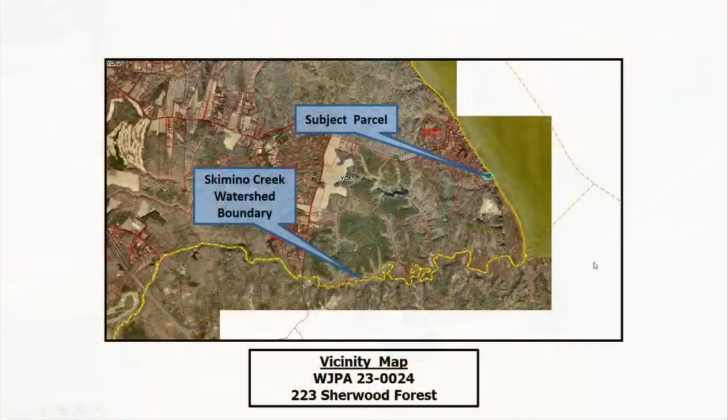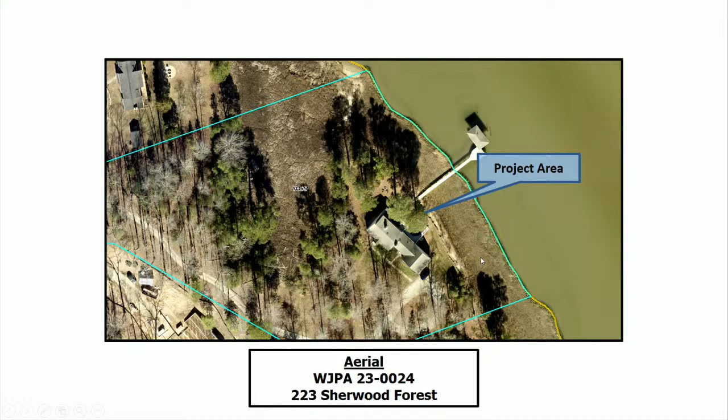This parcel can be seen here on the vicinity map, outlined in blue, and an aerial photograph of this property is also up on the screen. The area in question abuts the shoreline adjacent to an existing marsh. Some topography as it affects this site, and the floodplain as it affects this site.

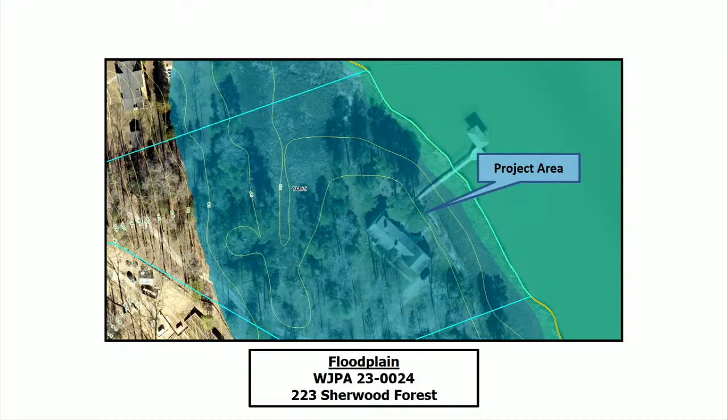The applicant is proposing to install a revetment along a shoreline scarp landward of that existing marsh and toe sill that exists in this channel. The existing shoreline is sloughing back towards a deck corner and threatening the integrity of the home on the property. For this reason, the applicant is proposing to line approximately 200 linear feet, 1,760 square feet of the existing shoreline with riprap. Because of the proximity of the deck to the existing marsh, there are approximately 30 square feet of vegetated wetland loss anticipated with the proposed revetment.

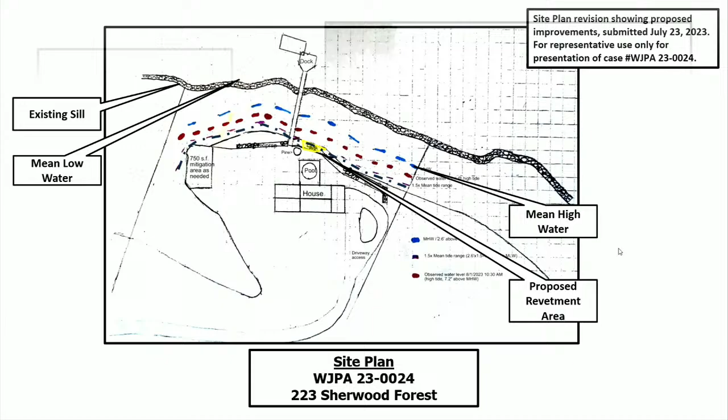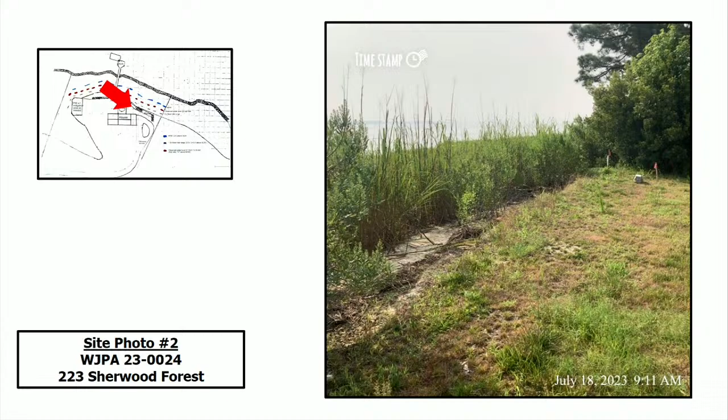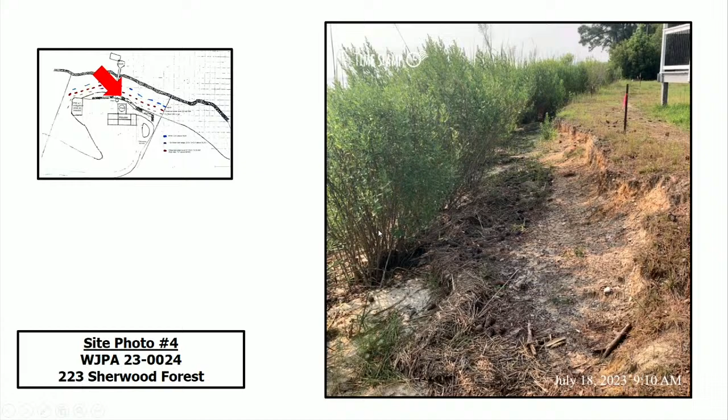This is the other side of that pier, looking at the other side of the property, and looking at the general region of which wetland loss would be occurring and the portion that falls within this board's jurisdiction.

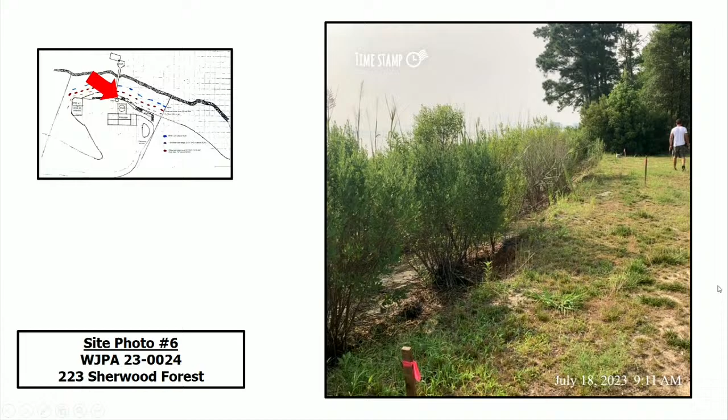As published in the Virginia Register on July 11th, 2005, the revised Wetland Mitigation Compensation Policy and Supplemental Guidelines, Regulation 4 VAC 20-390-10: Virginia as a Chesapeake Bay program partner is committed to achieve a no net loss of existing wetlands acreage and function in the signatory's regulatory program.

In order for a proposed project to be authorized to impact wetlands and compensate for the wetland loss in some prescribed manner, the following 3 criteria must be met.

All reasonable mitigative efforts, including alternative siting, which would eliminate or minimize wetland loss or disturbance, must be incorporated in the proposal. The proposal must clearly be water dependent in nature, and the proposal must demonstrate clearly its need to be in the wetlands and its overwhelming public and private benefits.

If the proposed project cannot meet one or more of the above criteria, the project must be denied or must occur in areas outside of wetlands. Should it satisfy all 3 criteria, however, compensation for the wetland loss is required.

The sequence of acceptable mitigation options should be as follows: on-site, off-site within the same watershed, mitigation banks in the same watershed, or a payment of an in lieu fee. If compensation is required, it should be a condition of the permit.

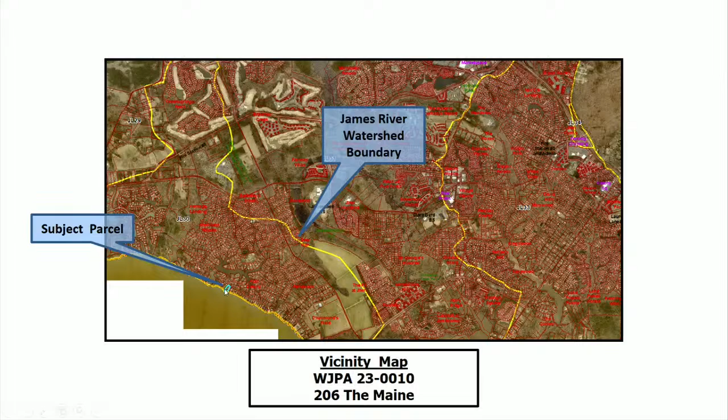James Ducker for the replacement of a bulkhead on property located at 206 The Maine within the James River watershed. The property can be seen outlined here in blue, and the watershed outlined in yellow. Here is aerial photography of the property. There is an existing timber bulkhead along the shoreline that is failing in multiple places.

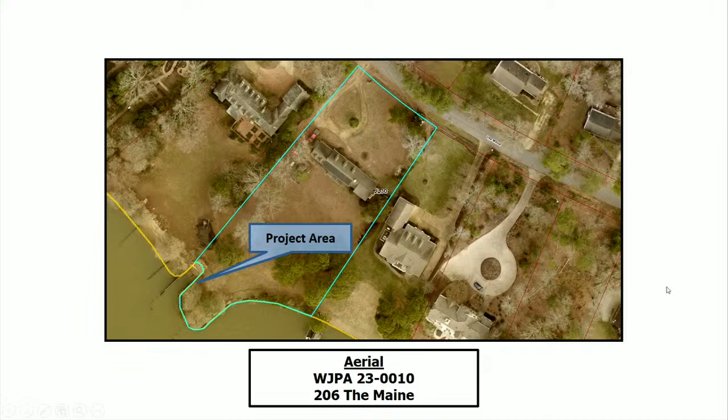Here's the topography at that site, the floodplain as it affects this property. As I said, there is the failing bulkhead along the shoreline. The applicant is proposing to replace this existing 300 linear foot bulkhead with a vinyl bulkhead. The new bulkhead will be installed in place of the existing structure along the peninsula and directly in front of the existing structure where severe erosion has not yet occurred.

The applicant has stated that a living shoreline is not appropriate for this property due to the significant grading that would be required and the loss of vegetation landward of the shoreline. You can see mean low and mean high water. Therefore, the board's jurisdiction is this area of the bulkhead shown in yellow, and the area of wetland impact, I think, got shifted a little bit, but should be kind of in line with the board's jurisdiction.

But due to the bulkhead failing, vegetated wetlands now exist landward of the existing bulkhead, hence why there are vegetated wetland impacts. By performing the bulkhead replacement, approximately 30 square feet of vegetated wetland impacts are anticipated with this project.

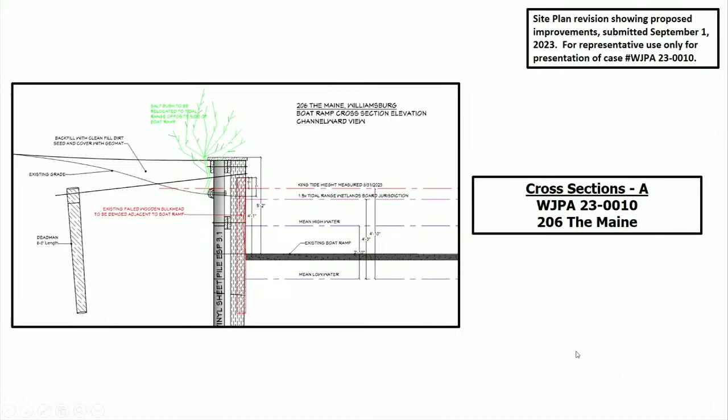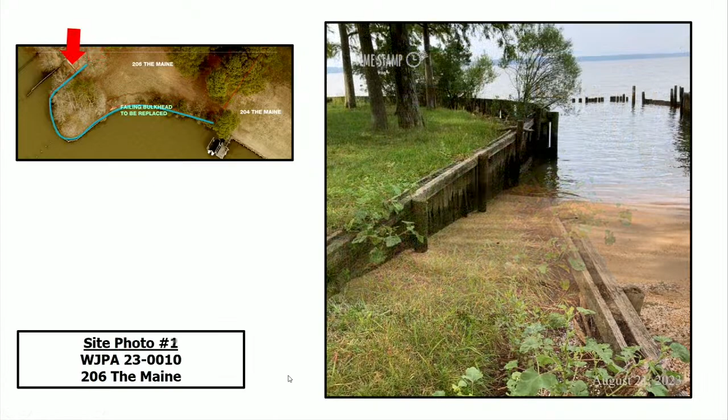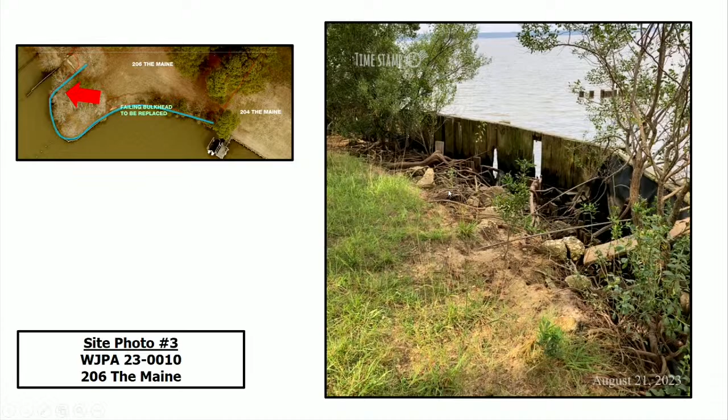Additionally, here is a cross-section of the proposed project. Site photography showing the portion within the board's jurisdiction here by the existing boat ramp. The issues with the existing bulkhead and the vegetated impacts, or vegetated wetlands occurring as a result of the failure. And just more pictures of the issues happening on this site currently.

As published in the Virginia Register on July 11th, 2005, the revised wetland mitigation compensation policy and supplemental guidelines, Virginia, as a Chesapeake Bay program partner, is committed to achieve a no net loss of existing wetland acreage and function in the signatories' regulatory programs. In order for a proposed project to be authorized to impact wetlands and compensate for the wetland loss in some prescribed manner, the following 3 criteria must be met.

All reasonable mitigative efforts, including alternative siting which would eliminate or minimize wetland loss or disturbance, must be incorporated into the proposal. The proposal must clearly be water dependent in nature, and the proposal must demonstrate clearly its need to be in the wetlands and its overwhelming public and private benefits.

If the proposed project cannot meet one or more of the above criteria, the project must be denied or must occur in areas outside of wetlands. Should it satisfy all 3 criteria, however, compensation for the wetland loss is required. The sequence of acceptable mitigation options should be as follows: on-site, off-site within the same watershed, mitigation banks in the same watershed, or a payment of an in lieu fee. If compensation is required, it should be a condition of the permit.

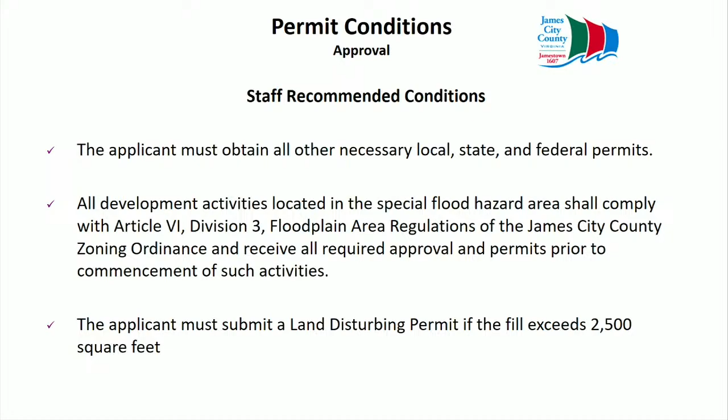The applicant must submit a land disturbing permit if the fill landward of the proposed bulkhead should exceed 2,500 square feet. If the applicant is not able to mitigate on site, the applicant must provide a receipt for the purchase of 30 square feet of tidal wetland credits from an approved wetlands mitigation bank.

The wetlands permit for this project shall expire on September 13th, 2026 if construction has not begun, and if an extension of the permit is needed, a written request must be submitted to the Stormwater and Resource Protection Division no later than August 2nd, 2026, which is 6 weeks prior to the expiration date.

If there are any questions, I'd be happy to answer them at this time. Thank you, Ms. Benedict. Any questions for Ms. Benedict?

The existing piles on the outside of that ramp that are busted off and broke off - are they going to remain like that? It looks like they just keep eroding and breaking off, and it's a hazard even coming in there. Is that going to be repaired? It's not part of this project as proposed.

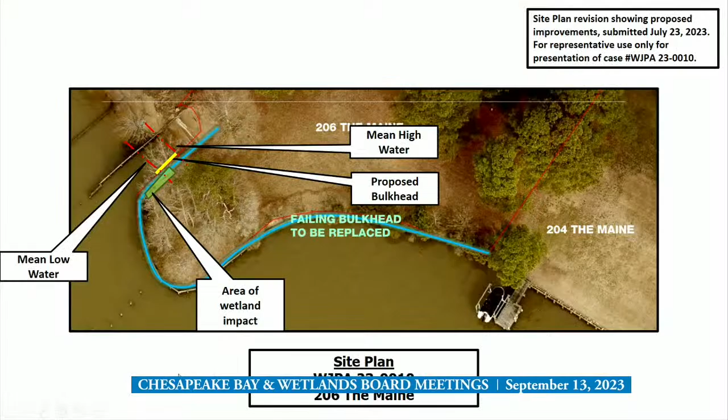Any other questions? So the bulkhead's gonna go around the entire perimeter of that blue line up there? Correct. The only portion that is within our jurisdiction is that limited area. Yes, back on the site plan, it's the area in yellow above. That is within the board's jurisdiction, including the vegetated wetlands behind. Yes, sir.

So I presume that the rest of the bulkhead is channelward of mean low water? Is that correct? Correct. What is the restriction on that channel as far as replacing and fixing that? Would that come before our board or not, if it were to be repaired? No, because it's not between mean low, 1.5 times mean low and mean high water. It's not within the jurisdiction of this board.

Thank you, Ms. Benedict. Does anyone from the public or does the applicant wish to speak on this matter? Please state your name and address for the record. Randy Carnell, 513 Dandy Loop Road in Yorktown.

Good evening. I don't have anything else to say, she did a great job summarizing the project. It's pretty straightforward, other than the fact that over time, this area of concern in the green up there has become part of your jurisdiction. There's a salt bush there, and I agree it's about 30 square feet, and the property owner has agreed to pay the mitigation because of the impacts.

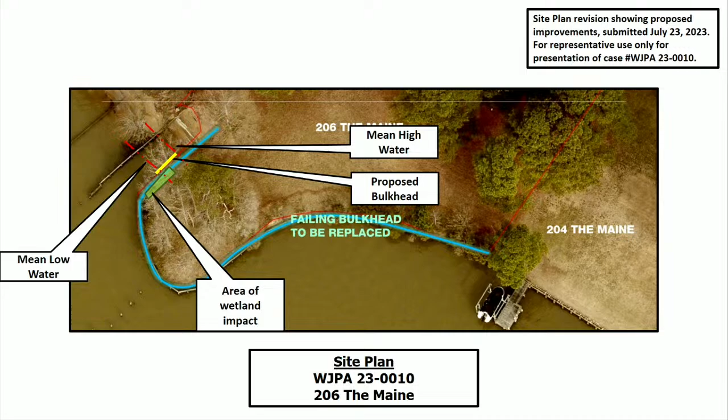On the northern side of that boat ramp, we would like to attempt to mitigate on site if possible. But from my understanding from Trevor, the state came out and said they do not recommend trying to move that salt bush over there because it most likely won't survive. So we're going to move forward with the mitigation. If y'all have any other questions, that's really why I came up here. Any questions? All right, thank you so much for your comments.

Seeing no other individuals wishing to speak, I'd like to close the public comment period, and it is up before the board. Any questions, comments, discussions from the board? Seeing none, do we have a motion on the floor?

Motion to adopt the resolution to grant the permit request for Wetlands Board Case WJPA 23-0010. Mr. Wilson, we have a motion to adopt the resolution. Can you get a roll call, please? Motion to adopt: Mr. Roadley, yes. Mr. Waltrip, yes. Mr. O'Brien, yes. Mr. May, yes. Motion passes 4-0.

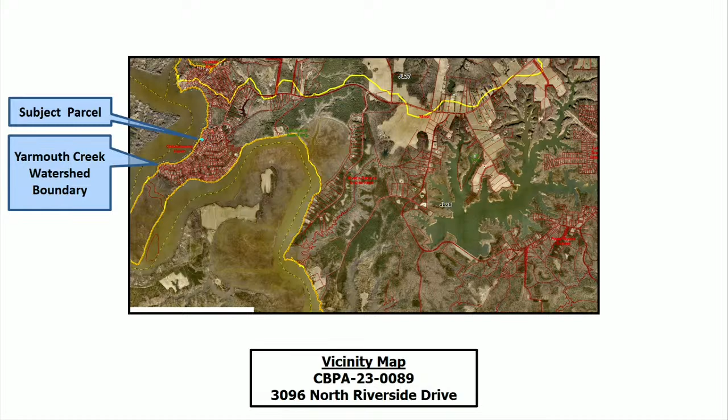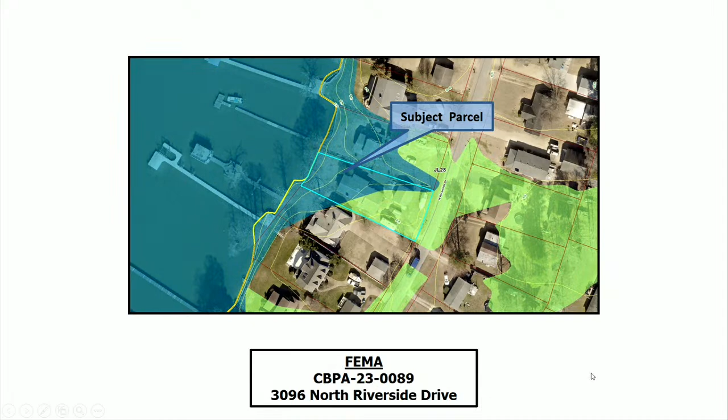Above, you can see the parcel outlined in blue here. This parcel was platted in 1959 prior to the adoption of the Chesapeake Bay Preservation Ordinance in 1990. Here you can see aerial photography of the property, the topography of the property, which is fairly flat, the floodplain as it affects this property, and the resource protection area.

The total lot size of this property is 0.32 acres, of which 31% is located within the RPA. The applicant is proposing to construct a new 156 square foot deck adjacent to the rear of the home.

Existing conditions on this property include a 126 square foot concrete patio in the area of the proposed deck. The existing patio is shown here in red, and the proposed deck would extend on either side of the existing patio, with those areas shown here in yellow.

You'll see the 100-foot RPA and the 50-foot RPA shown in red, as well as the floodplain shown here in blue. Total new impacts to the RPA associated with this proposal equate to 30 square feet within the landward 50-foot RPA. Required mitigation for this amount of impervious impacts equals 2 shrubs.

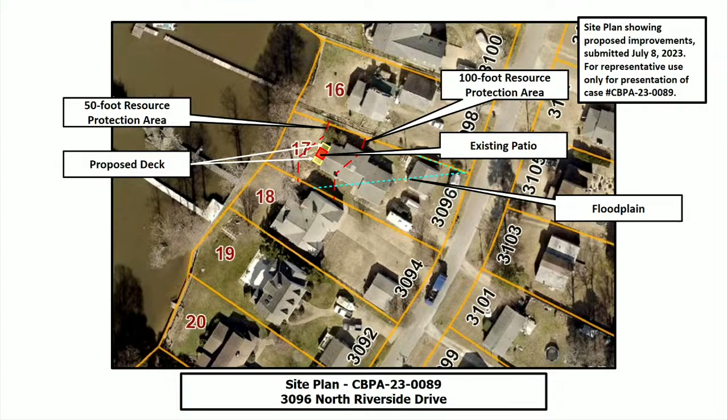Staff has evaluated the application and exception request for the construction of a deck. This application meets the ordinance conditions in sections 23-11 and 23-14 and should be heard by the board because the construction of a deck is considered accessory in nature. The board may grant exceptions to section 23-7 if the application meets the following 5 conditions.

The exception request is the minimum necessary to afford relief. Granting the exception will not confer upon the applicant any special privileges denied to other property owners in the vicinity. The exception request will be in harmony with the purpose and intent of Chapter 23 and is not of substantial detriment to water quality. The exception request is not based on conditions or circumstances that are self-created or self-imposed, and reasonable conditions are imposed which will prevent the exception request from causing a degradation of water quality.

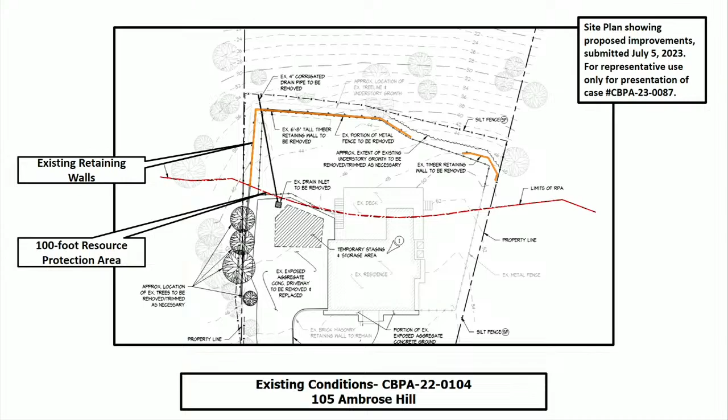Case number CBPA-22-0104 did appear before the board on September 14th, 2022 for the approval and the replacement of this retaining wall. The applicants revised the approved plan to account for an additional retaining wall necessary to accommodate James City County retaining wall ordinances. This section, though it is light, would be indicated here in this corner. At that portion of the wall, the proposed and previously approved wall became too tall to meet the zoning and building ordinance of James City County.

Given that this approved permit would expire tomorrow, the applicants wish to bring the entirety of the project, including the new retaining wall, to the board this evening. Total impacts to the RPA associated with this proposal equate to 124 square feet of impacts to the landward 50-foot RPA. Required mitigation for this amount of impervious impacts equals the planting of 5 shrubs.

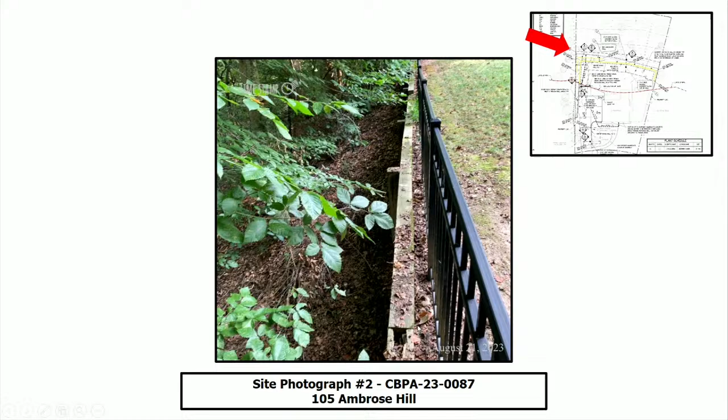Looking down this line, you can see degradation within this retaining wall, and looking back in that same area where the second retaining wall will be necessary, again further evidence of the degradation occurring in the existing retaining wall.

Staff has evaluated the application and exception request for the construction of 2 retaining walls. This application meets the ordinance conditions in sections 23-11 and 23-14 and should be heard by the board because construction of retaining walls is considered accessory in nature. The board may grant exceptions to section 23-7 if the application meets the following 5 conditions.

The exception request is the minimum necessary to afford relief. Granting the exception will not confer upon the applicants any special privileges denied by Chapter 23 to other property owners similarly situated in the vicinity. The exception request will be in harmony with the purpose and intent of Chapter 23 and is not of substantial detriment to water quality. The exception request is not based on conditions or circumstances that are self-created or self-imposed, and reasonable and appropriate conditions are imposed which will prevent the exception request from causing a degradation of water quality.

Staff has reviewed the application and exception request and has determined the impacts associated with the proposal to be minor for the proposed development. Staff recommends approval for this exception request, and if the board wishes to approve the request, staff recommends the following conditions be incorporated into its approval.

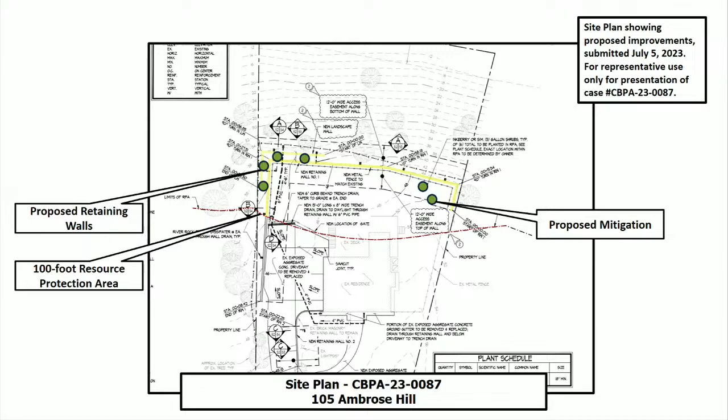So it's tearing down the very high retaining wall? Yes, sir. Okay, very good. Thank you very much. Thank you.

I would like to open the public hearing. Is there anyone that would like to address the board on this matter? Very good. The public hearing will remain open. Any further discussion from the board? Sir? And I will close the public hearing.

Do we have a motion? Motion to adopt the resolution to grant the exception request for Chesapeake Bay Board case CBPA 23-0087 at 105 Ambrose Hill. Mr. Wilson, motion to adopt. Mr. Waltrip? Yes. Mr. O'Brien? Yes. Mr. May? Yes. Mr. Roadley? Yes.

Motion passes 4-0. Next item on the agenda is CBPA 23-0098 at 109 Brancaster. Ms. Benedict.

Mr. Chair, members of the board, Robin Benedict, Watershed Planner, presenting CBPA 23-0098. Mr. Chase Grogg with Landtech Resources has applied for a Chesapeake Bay exception on behalf of Ms. Hillary Brown and Mr. Darnell Lamont Coville for encroachments into the RPA buffer for the construction of a single-family dwelling located at 109 Brancaster within the Fords Colony subdivision and the Powhatan Creek watershed.

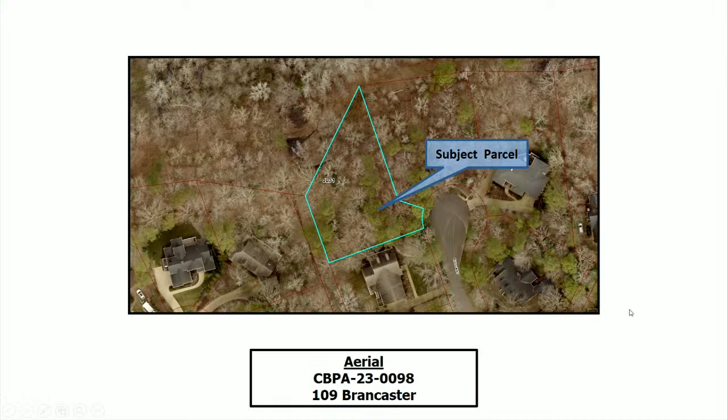You'll find the subject parcel outlined here in blue. This parcel was platted in 1981 prior to the adoption of the Chesapeake Bay Preservation Ordinance in 1990. Here is aerial photography of the property. It is completely wooded and does have wetlands on the back half of the property.

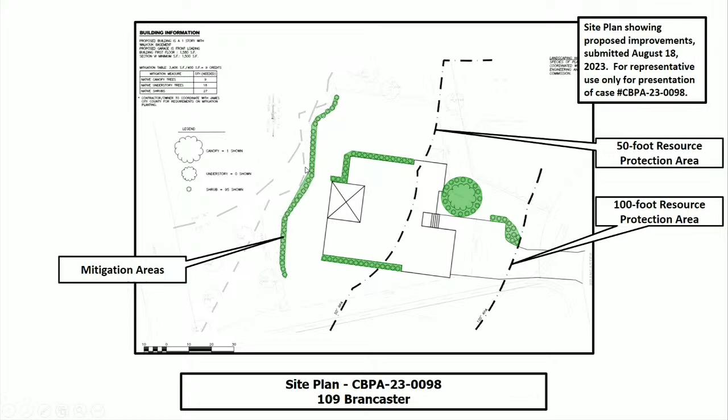Staff is also requesting that an affidavit be recorded in the Williamsburg, James City County Courthouse due to the environmental sensitivity of this lot.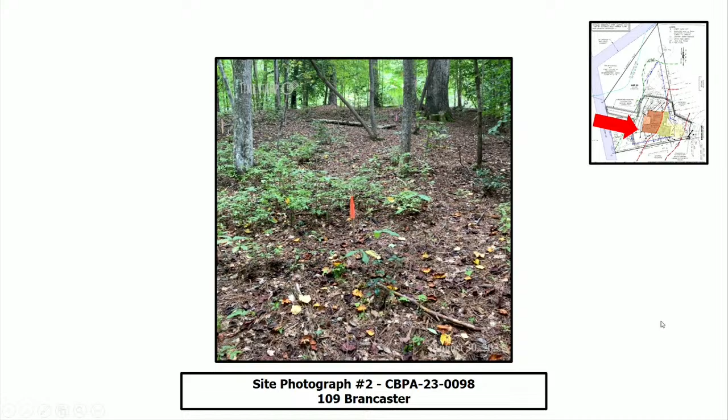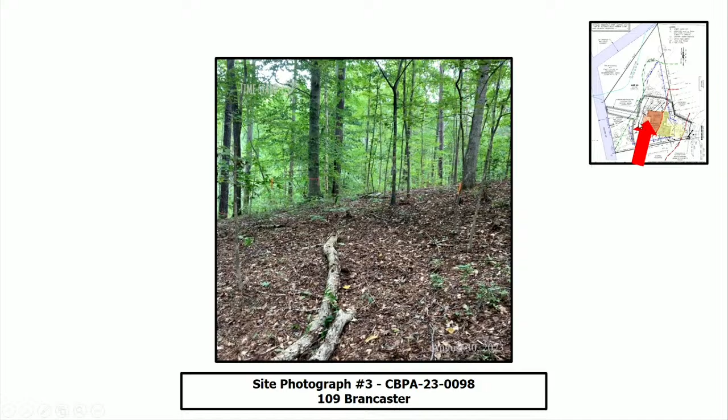Here is site photography, standing at the road and looking back towards this property. Standing at the back of the house and looking up towards the road. Looking, here is another house corner flagged here in orange, showing the right side of the property and back towards the wetlands.

Staff has evaluated the application and exception request for the construction of a single-family dwelling. This application meets the ordinance conditions in sections 23-11 and 23-14 and should be heard by the board because the construction of the single-family dwelling extends into the seaward 50-foot RPA. The board may grant exceptions to section 23-7 if the application meets the following 5 conditions.

The exception request is the minimum necessary to afford relief. Granting the exception will not confer upon the applicants any special privileges denied to other property owners in the vicinity. The exception request will be in harmony with the purpose and intent of Chapter 23 and is not of substantial detriment to water quality. The exception request is not based on conditions or circumstances that are self-created or self-imposed, and reasonable conditions are imposed which will prevent the exception request from causing a degradation of water quality.

Staff has reviewed the application and exception request and has determined the impacts associated with this proposal to be major for the proposed development. Staff recommends approval for this exception request, and if the board wishes to approve the request, staff recommends the following conditions be incorporated into the approval.

The applicants must obtain all other necessary federal, state, and local permits as required for this project. An affidavit must be recorded in the Williamsburg, James City County Courthouse prior to the issuance of a building permit. The applicants must submit a surety of $6,750 and a form acceptable to the James City County Attorney's Office to guarantee the mitigation plantings.

In response to you, Mr. Rodley, about other mitigation measures, we're technically slightly overplanted. Mitigation calls for 8.5. We're proposing 9 mitigation credits. The lot basically slopes from the beginning all the way to the back, so we don't have a lot of opportunity to be able to place some sort of infiltration, with at the toe of the slope right next to the wetlands, concerns with that water getting back into that.

It's outside of your guys' jurisdiction, but just to point it out, right now our clean out is clear back here, which is through the wetlands. Along this property line, you'll see there's a manhole here, a clean out, and a clean out. We are working with JCSA to see if there's a way that we could avoid those wetland impacts and shift that clean out coming over here. I haven't gotten final clarification of that. It looks positive at the moment, but again, I know that's outside of your guys' jurisdiction, but it would be nice to be able to leave those wetlands intact and be able to armor that with our mitigation right in front of it. Happy to answer any other questions you have.

Ms. Brown, Mr. Coville, and their contractor, Brian Parsons, are also here as well. Any questions?

The elevation of the wetlands water level to the bottom of the basement - how much lower is the basement than the water level for the wetlands? Proposed basement is down at about 39, and the flood zone in that area is elevation 33. So we're significantly higher than the flood zone, as well as the wetlands. The wetlands run right along about the 33-foot contour. So we're going to sit up. You're going to have flooding into that? Oh, we will be completely in flood zone X.

Back to our site plan. One thing I'd like to point out to the members of the board, there's an existing concrete swale. So he is correct that the water comes around here, goes into this swale. There'll be a pipe underneath our driveway. This swale coming from this side turns here, goes along the property line. So some of our water will utilize that existing channel that's been there for stormwater to be able to direct that water away from our house, as well as to be able to handle some of our water. I'd just like to point that out.

Again, not exactly an RPA issue, but helpful to understand where some of our runoff is going to go from our lot. Within the context of the flood zone, perhaps we could move to the floodplain map here. The flood zone is this line, right, the triple dot with a dash. This dashed, triple-dot line comes right along basically the wetlands. As discussed, this is the 32 contour. Right now we only have even contours on here, otherwise it's a contour city. That runs basically along the 33, which is the flood zone elevation. When the lot was originally platted, the 100-year flood elevation was way in the back. Obviously things have changed since that was done, but so that's where it currently is.

Again, our finished floor will be well above, well out of the concerns of that. Yes, there'll be water relatively close behind our house, but the presumption that there would be water in that building envelope is going to be from runoff, not so much from the water flowing up. There could be, there's always the chance when you dig a basement that you run into groundwater, but you can install a French drain to handle that.

I don't believe surface runoff is going to be a concern on our lot, because there's going to be a ridge across the front that directs water into this channel. We'll handle the bit that comes off our roof through a swale that sheet flows out this way. We wanted it to be sheet flow as possible, since we don't want a channel that whips around and goes all the way down. So the only swale on our property is out front to get water away from the house. The rest is sheet flow into this concrete ditch and out into the woods prior to the resource.

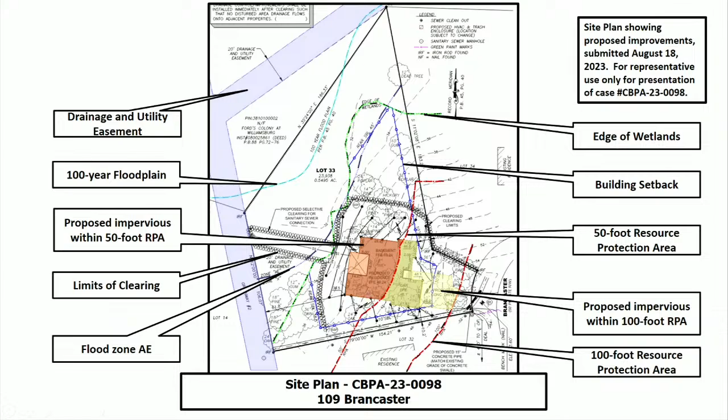Would anybody else care to address the board on this matter? Hearing none, the matter is before the board for discussion.

Mr. Chair, when first looking at this, I was wanting to see some additional mitigation measures, since there's a lot of water coming down that street out into the wetland area as far as the water flow path. But they do have a concrete swale and things directing the water around the house to an existing drainage system. The home is built as close to the building setback as they can get it. They can't push it any further forward out of the RPA - it's always going to be in the RPA. The square footage of the house is right at the minimum on that street, just 6% over. But I think I would be inclined to support this application.

Other thoughts or comments from the board? I don't have much to add to that. Waltrip?

I think they've done as much as they can do to move that water down the side. That house is not in the floodplain, and I personally would not.

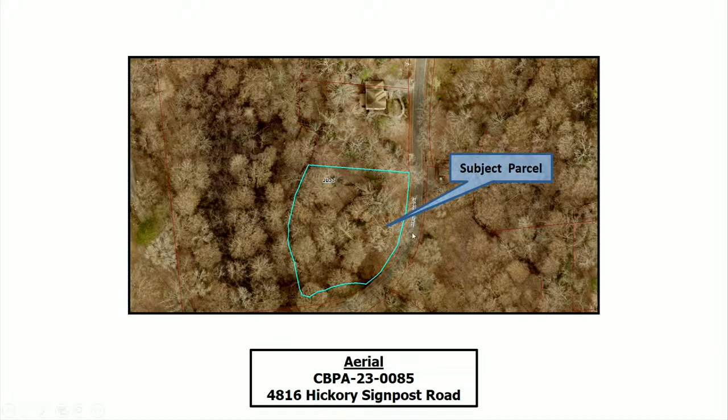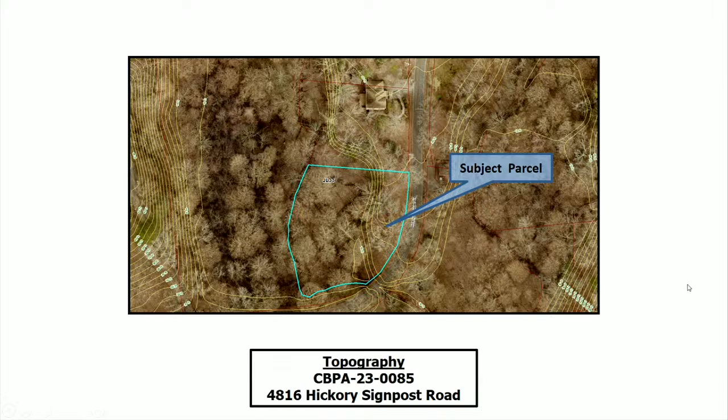The topography and existing conditions of this site: there is a small flat area adjacent to Hickory Signpost Road, of which the subject parcel is proposed, and it slopes off fairly quickly into a floodplain wetland system with a stream running through the middle. The RPA as it affects this property is 100% within the RPA.

Total impacts to the RPA associated with this proposal equate to 134 square feet of impacts to the landward 50-foot RPA and 948 square feet of impacts to the seaward 50-foot RPA. This house is approximately 420 square feet.

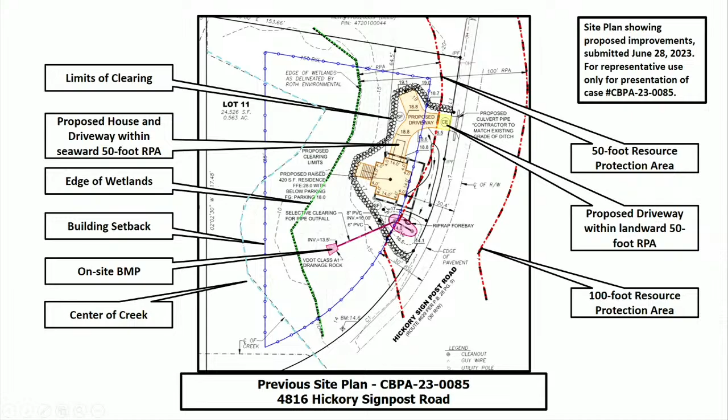I did want to point out that there has been a change. This deck on the back here is now proposed to the side here. Oh, I'm sorry, this is the previous site plan, so I'm glad to see that. This is the previous site plan submitted for this case.

A change has been made to decrease the amount of impacts towards those wetlands. They have moved these stairs over to the side. In total, while it does not decrease the impervious area on this site, it does decrease the disturbance on the site by 60 square feet.

Total impacts to the RPA, again, equate to 1,082 square feet of impacts associated with everything here. That includes the driveway and the proposed house.

In May of 2022, the applicants gained approval from the Board of Zoning Appeals to move the building setback from 60 feet to 30 feet in an effort to move the proposed dwelling further from the wetlands.

This property appeared before the Chesapeake Bay Board in June of 2022 for the approval of a 548 square foot single family dwelling. I'm going to move one slide ahead to give you guys the history of this exception request.

The original approval request included a 548 square foot single family dwelling with a 140 square foot deck, a 109 square foot patio, and a 942 square foot driveway. Exception request CBPA 22-0060 was denied during this meeting.

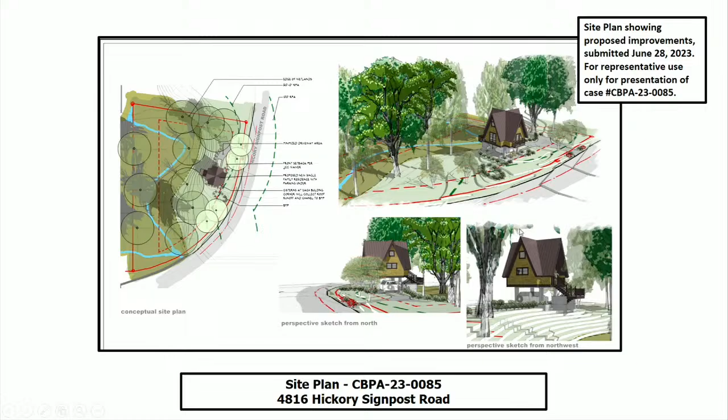This is an architectural rendering of this house. It hasn't been updated to show how the stairs were relocated, though it is still applicable to the remainder of the house.

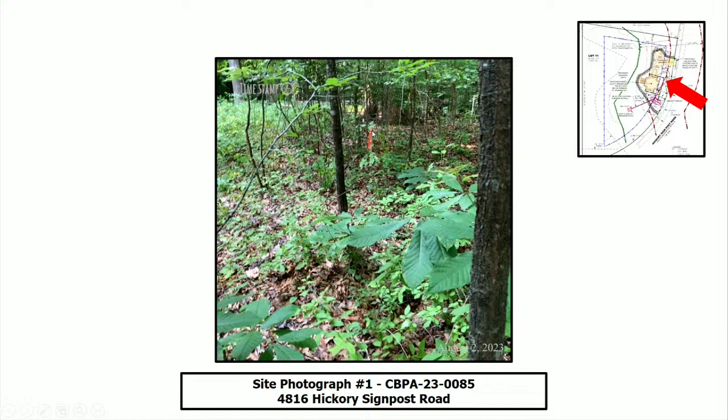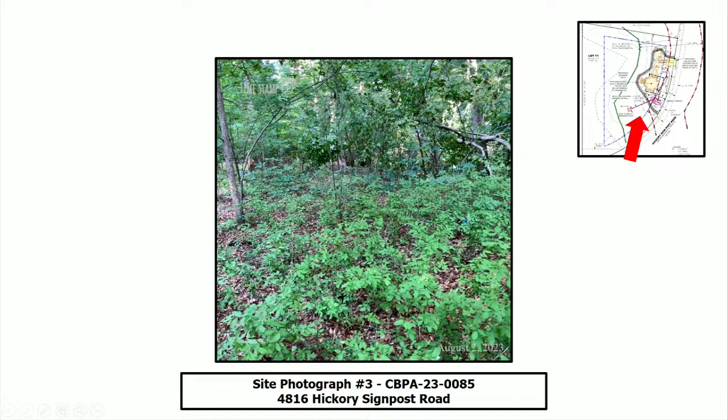Some site photographs. This orange stake here indicates the corner of the front home. Kind of looking back towards the resource and where the BMP may be located. Through this brush here would be the approximate location of the home.

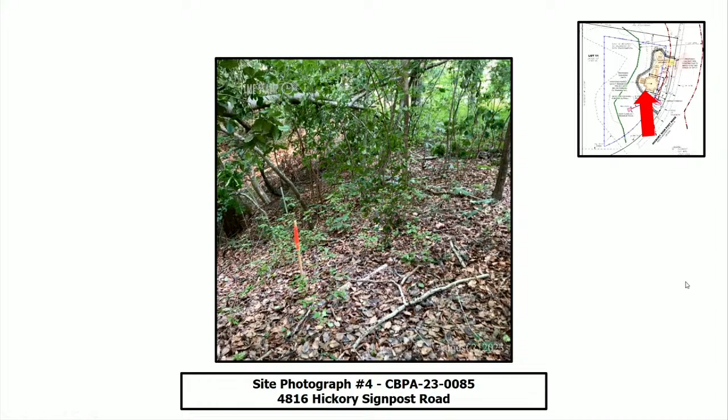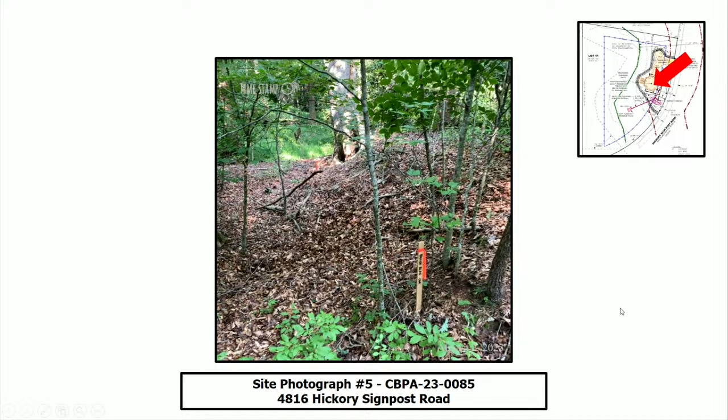Standing at the corner of the house, this is an orange flag here as well. So this is standing kind of at the front corner of the house looking back towards the wetlands. The wetlands begin approximately in the location where this green vegetation is beyond this slope, which you can kind of see here. From the road looking in, this is the approximate location of the driveway.

Staff has evaluated the application and exception request for the construction of a single-family dwelling. This application meets the ordinance conditions in sections 23-11 and 23-14 and should be heard by the board because the construction of a single-family dwelling extends into the seaward 50-foot RPA. The board may grant exceptions to section 23-7 if the application meets the following 5 conditions.

The exception requests the minimum necessary to afford relief. Granting the exception will not confer upon the applicants any special privileges denied by Chapter 23 to other property owners similarly situated in the vicinity. The exception request will be in harmony with the purpose and intent of Chapter 23 and is not of substantial detriment to water quality. The exception request is not based on conditions or circumstances that are either self-created or self-imposed, and reasonable and appropriate conditions are imposed which will prevent the exception request from causing a degradation of water quality.

Staff has reviewed the application and exception request and has determined the impacts associated with the proposal to be moderate for the proposed development. If the board wishes to approve this request, staff recommends the following conditions be incorporated into the approval: the applicants must obtain all other necessary federal, state, and local permits as required.

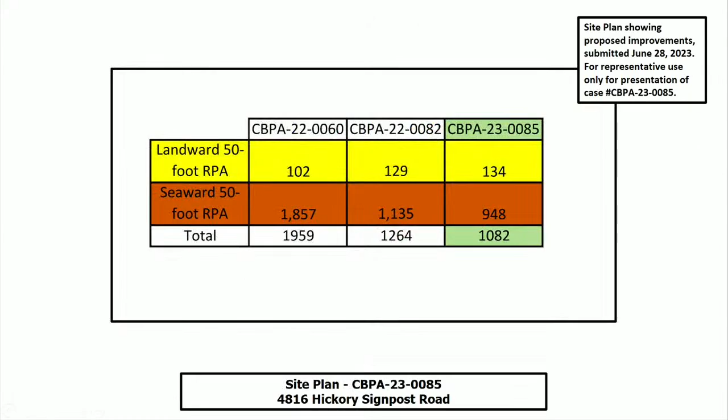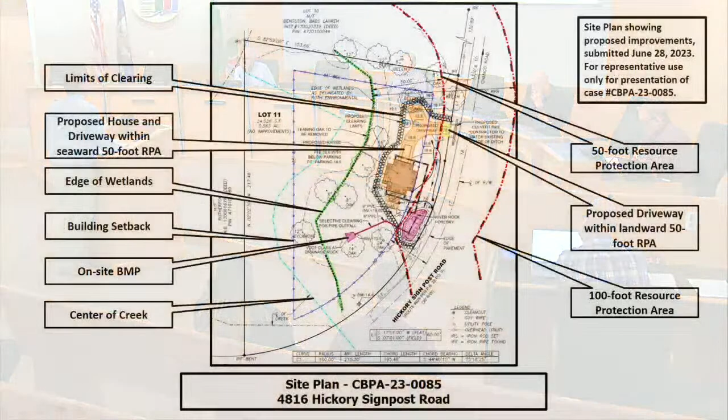Beech trees here. There are 3 other smaller trees up here - 1, 2, and 3. Then the leaning tree is here, coming out leaning on, I believe, this 12-inch tree.

So those are the trees that are all coming out. That pretty much - every time we've gone back, we've tried to squeeze more and more out of this and make it as small an impact as possible. I honestly think this is the least that could possibly be done for this lot that's been around since the 70s, just trying to make a low impact site.

I think increasing the capacity of that BMP helps with the initial flush of water, helps contain it, slow it down. During a majority of rains a lot is going to infiltrate through the soil media there. And even during a good rain, it has plenty of ponding space and can sheet flow around, so there's not just concentrated flow.

Again, running our limits of disturbance along this top of bank. All of this drainage is being shifted this way, catching all of our roof runoff, and then with a swale in front of the house to make that our main point of treatment. Happy to answer any questions you may have.

Questions for Mr. Grog?

One tree in the back is leaning, looks like that's getting ready to come down anyway. Yes, it's basically on the slope back there, so I would love to be able to get it before it falls, because if it were to fall it's going to take a massive root ball out of the side of the slope there. Both the beech and that tree have, I believe, a good storm in front of them and they wouldn't be there - but again, just my opinion.

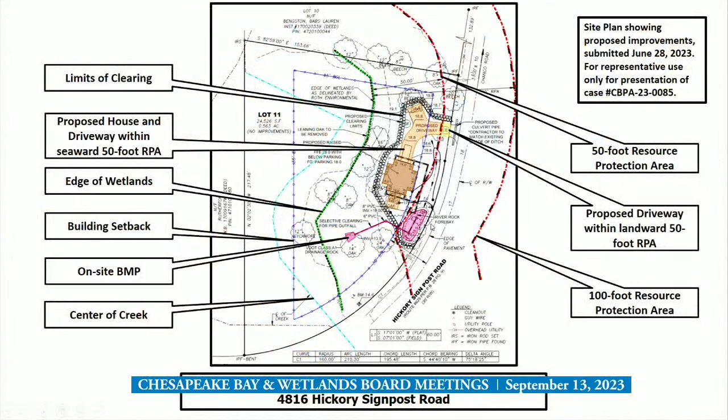Just realizing that the water that comes down the road into that BMP - does that catch the road? No, the road would be a separate ditch. Basically, the road ditch comes down here, and then there's a point right in this area where it fizzles and it's kind of cut its own path this way.

I think during a decent rainstorm it continues down and pretty much gets to the bridge down here and then just goes into the creek. Our site is a little bit higher than the edge of the road here, so we would just be extending that berm down - so there would be a roadside ditch, and then our enlarged BMP within.

The BMP is basically handling the lot itself - all of the water that falls within our limits of disturbance is going to that BMP, both non-impervious and impervious.

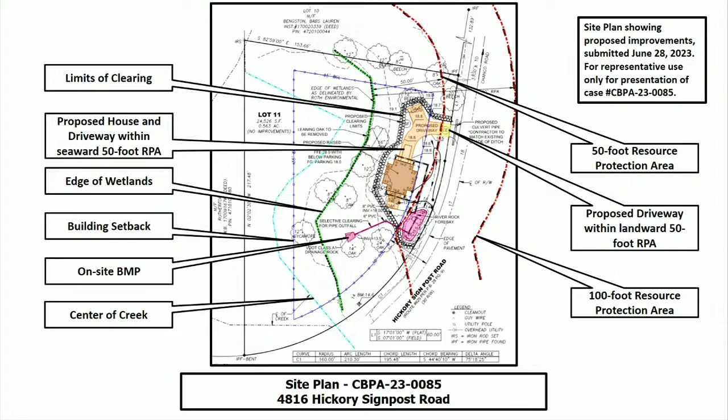So even if you were to have gotten authorization to move the building or the home closer to the road, you'd still be in the seaward. So essentially everything done here is in the seaward - correct, everything is in the 50 foot. Again, just trying to see if there was a path forward by giving them a call, since everything's on the board with this project.

House built on stilts - that's correct. So, for those who weren't at the last meeting, in discussions trying to reduce impervious surface on the lot, the house is placed up on stilts so there's still a parking space underneath. This drive serves as a place to come off the road, pull underneath - maybe another car could park here - be able to back out and leave facing the road.

That's the first one I've seen in this area built like that. Again, another way to try and squeeze as many - it was Mr. Hopke's creative idea on trying to get as much bang for our buck on this one.

Any other questions? Thank you, Mr. Grog. Miss Marcano would like to speak, the owner. Yep, happy to.

Hello, board members. My name is Sonny Marcano. I reside at 817 23rd Street in Virginia Beach, Virginia. I'd just like to simply say, I'm asking the board to see our vision. I'm hoping to be granted the opportunity to build just a small dwelling on the land in which my family has owned for over 60 years. I think we deserve to be able to pass this down to our next generation. And I thank you.